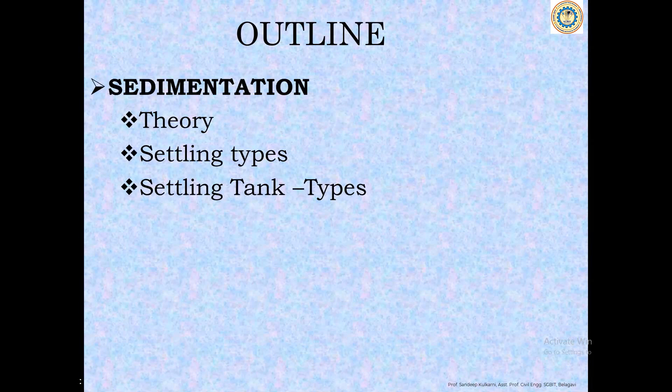Now the raw water, which comes from the screening part, contains a number of suspended impurities or particles. Such suspended particles can be removed effectively by allowing the particles to settle down in water for a known time. This process of removal of suspended particles by gravitational settling under still water conditions is called sedimentation. The objective of sedimentation is to separate the suspended solids from the liquid using the force of gravity.

And the basin in which the flow of water is retarded is called the settling tank or the sedimentation tank, or it may also be called the sedimentation basin or a clarifier. The theoretical average time for which the water is detained in the tank is called the detention period. The tank has to be designed in such a way as to reduce the flow velocity so as to permit the suspended solids to settle out by the action of gravity.

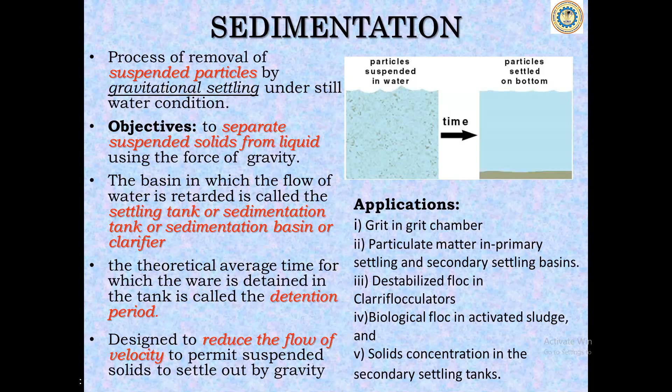Now this sedimentation process can be used in various parts, maybe in the removal of grit in the grit chamber, or particulate matter in the primary settling or secondary settling basins, or the destabilized floc in the clariflocculators, or removal of the biological floc in activated sludge, and removal of solid concentrations in the secondary settling tanks.

Now coming to the types of sedimentation, there are two types, namely plain sedimentation and sedimentation with coagulation. In plain sedimentation, impurities are removed by the action of gravity alone. The water is allowed to stay in still water condition where, because of gravity action, the impurities will be removed. It is a simple and cheaper method and it is used in the filtration of water technique.

The second type is sedimentation with coagulation, where the impurities are removed by adding chemicals to water, forming flocs. With rapid mixing, the water coagulates and forms flocs, and those flocs will be removed by the process of sedimentation. In detail, we will be studying both types, that is plain sedimentation and sedimentation with coagulation.

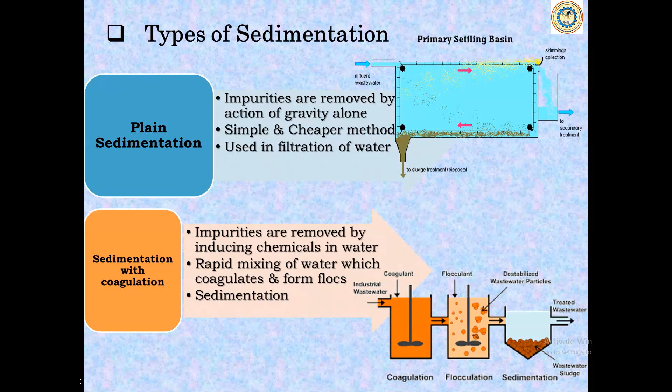Before studying the types of sedimentation, we should know the types of settling of particles, how the particles actually settle down. Settling of particles mainly depends upon the characteristics of particles and the concentration of particles in suspension. According to the characteristics and concentration, four types of settling are possible. They are discrete particles, flocculating particles, hindered or zone settling, and compression settling.

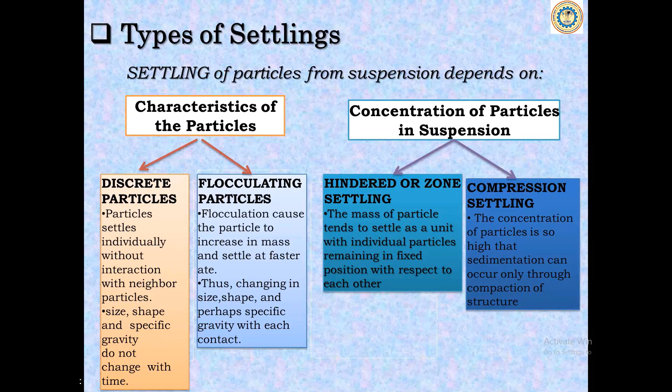Some examples of the settlings: discrete settling is applicable for the removal of grit or sand in wastewater treatment, and the removal of suspended solids in the primary clarifier comes under flocculent settling, whereas the removal of biological floc in wastewater secondary treatment comes under hindered settling, and whatever sludge gets to the bottom of the tank comes under compression settling.

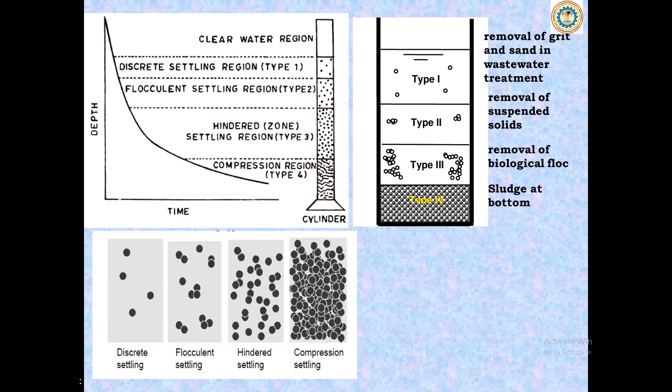Next we'll discuss types of sedimentation tanks. Sedimentation tanks may function either intermittently or continuously. The intermittent tanks, also called quiescent tanks, are those which store the water for certain periods and keep it in complete rest. Whereas in the continuous flow type tank, the flow velocity is only reduced and water is not brought to complete rest as in an intermittent tank.

So usually we go with the continuous type of tank, because in the intermittent tank we have to allow the water complete rest, whereas in the continuous one only the velocity is reduced, so the flow is continuous. According to shape, there are three types of settling tanks: rectangular tank, circular tank, and the hopper bottom tank or vertical tank.

Usually rectangular tanks with horizontal flow are preferred compared to circular or hopper bottom tanks. Rectangular tanks are long rectangular basins which are hydraulically more stable, and flow control for larger volumes is easier because of the configuration. A typical long rectangular tank has a length 2 to 4 times its width, and its bottom is slightly sloped to facilitate sludge scraping.

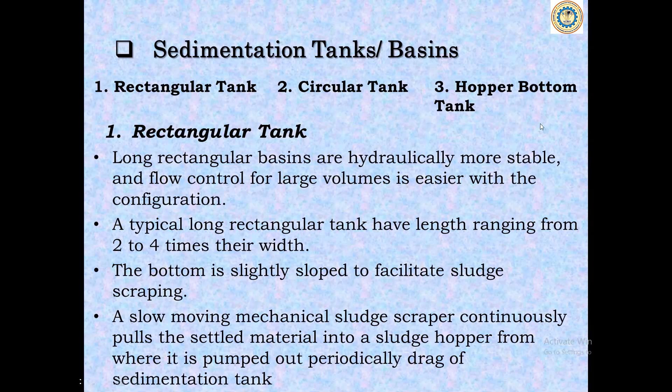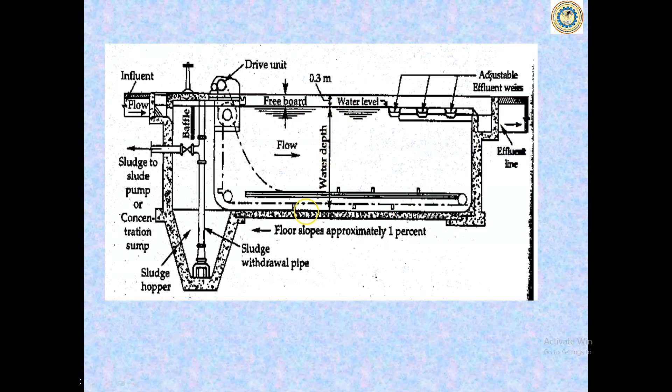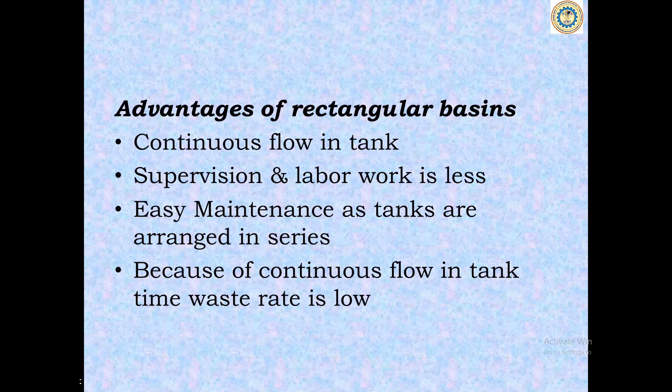Now, coming to the advantages: there is continuous flow in the tank, construction is cheaper, maintenance is easy, and supervision and labor work is less. Maintenance is easy as the tanks are arranged in series. Because of continuous flow in the tank, time wastage will be less.

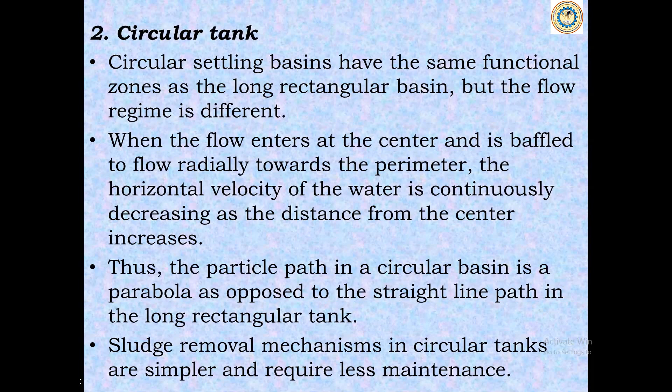The second type of tank is the circular tank. Circular settling basins have the same functional zones as long rectangular basins, but the flow regime is different. When the flow enters at the center and is baffled to flow radially towards the perimeter, the horizontal velocity of water continuously decreases as the distance from the center increases. Thus, the particle path in a circular basin is a parabola, as opposed to the straight line path in the long rectangular tank. Sludge removal mechanisms in circular tanks are simple and require less maintenance.

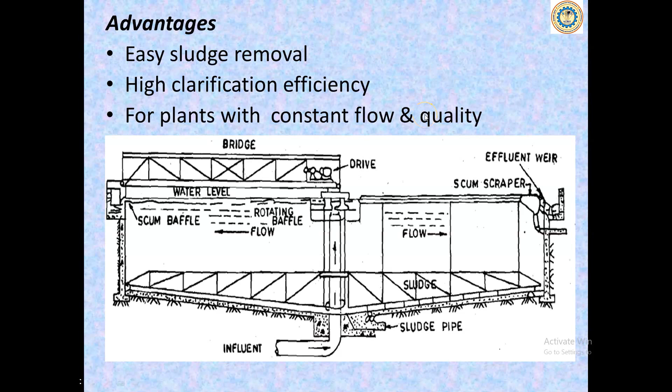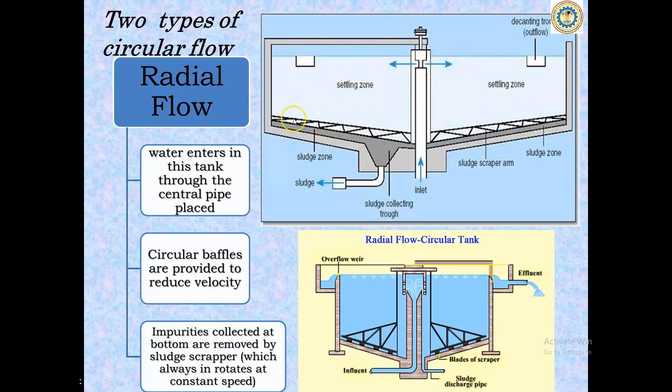Now there are two types of circular flows: one is the radial flow and another is the spiral flow. In radial flow, the water enters the tank through a centrally placed pipe, as you see in this diagram. Circular baffles are provided to reduce the velocities, and impurities are collected at the bottom, which are removed by the sludge scrapers. So in radial flow, the water enters through the central inlet and passes to both sides of the tank in a radial manner.

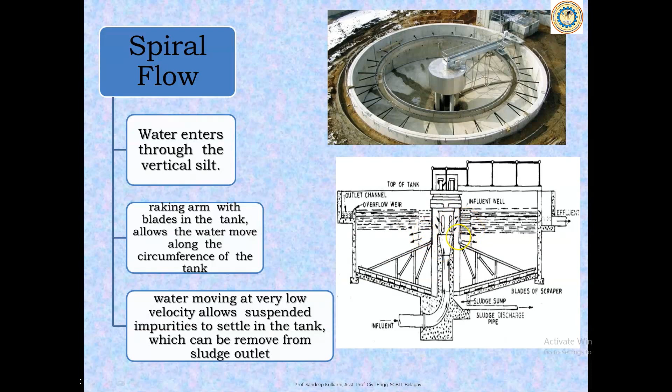Whereas in the spiral flow, the water enters through the vertical slit. Here the raking arms are provided with blades which allow the water to move along the circumference of the tank. The water moving at very low velocity allows the suspended impurities to settle in the tank, which can be removed from the sludge outlet. So in this type, the influent is taken from the center, but the flow will be spiral, in the shape of a spring. So again the velocity will be...

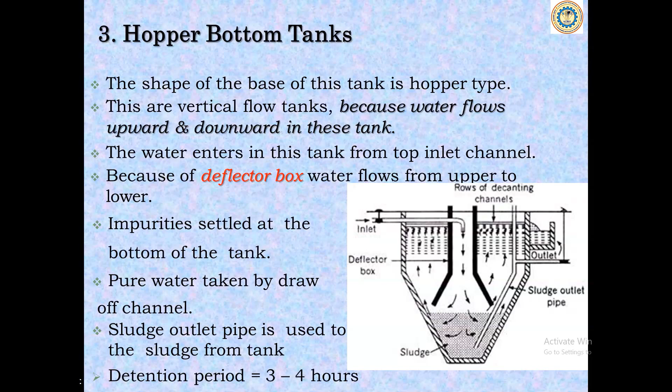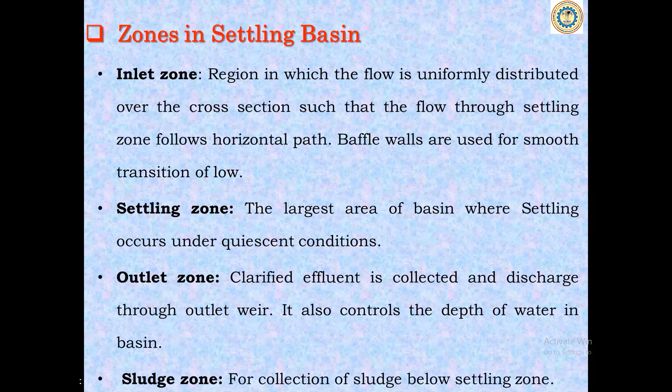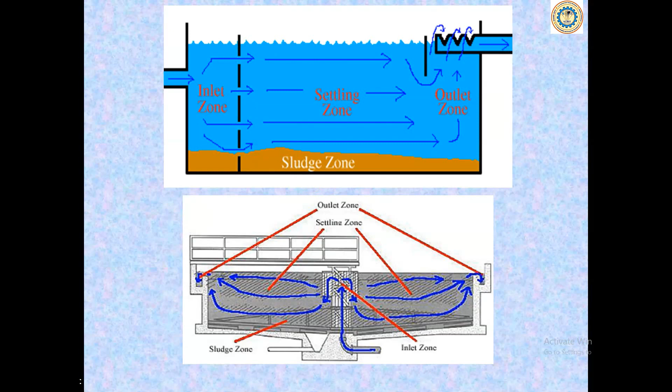Then coming to the last zone, the sludge zone, where the collection of the sludge takes place, which is below the settling zone. This sludge will be removed by the sludge scraper through the sludge outlet. So these are the 4 zones where the settling takes place.

Now coming to the arrangements made at the inlet and outlet of the tank. At the inlet, the inlets are designed to distribute the water equally at uniform velocities. A baffle wall should be constructed across the basin close to the inlet and should project several feet below the water surface to dissipate the inlet velocities and provide uniform flow. So at the inlet of the tank, where the inlet pipe is provided, baffle walls are provided to get uniform velocity.

This is one type of inlet device where the baffle wall is provided up to a certain depth. Here, whatever water is coming at certain velocities will be transformed into a smooth flow. These are again some types of inlet arrangements. Here also baffle walls are made with multiple openings. In this portion, whatever turbulence is there will be reduced, that is, the velocity will be reduced to a great extent.

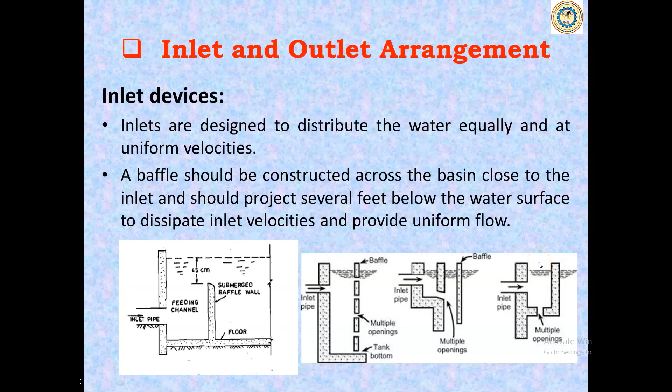Now coming to the outlet device, the outlet weirs or submerged orifices shall be designed to maintain velocities suitable for settling in the basin and to minimize short circuiting. The effluent coming from the sedimentation tank has to be taken out with uniform velocity. To maintain the uniform velocity and minimize short circuiting, weirs or orifices are used.

So in today's session we discussed what sedimentation is, what a sedimentation tank is, the types of sedimentation, the types of settling, the types of sedimentation tanks, the various zones in sedimentation, and inlet and outlet devices.